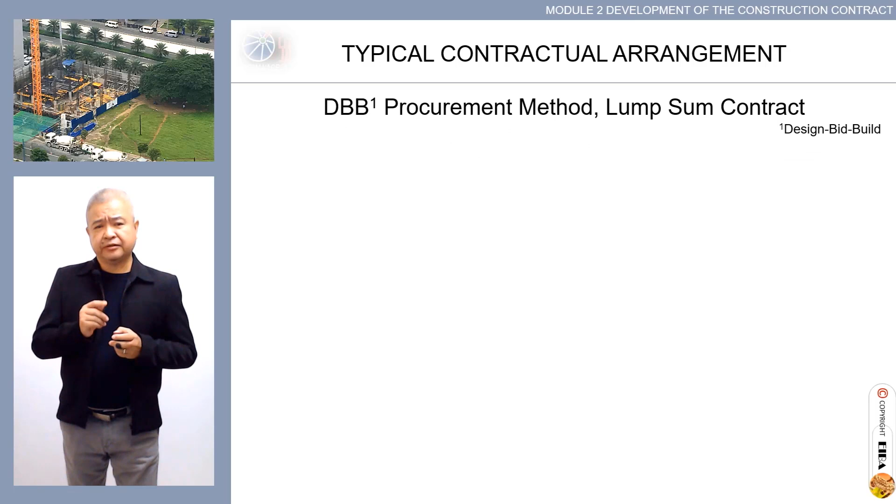Central to the arrangement is the owner. The owner may contract advisors or specialist consultants who can provide services in order to protect the interests of the owner in the project. These can be consultants with expertise in financials, contracts, and project management.

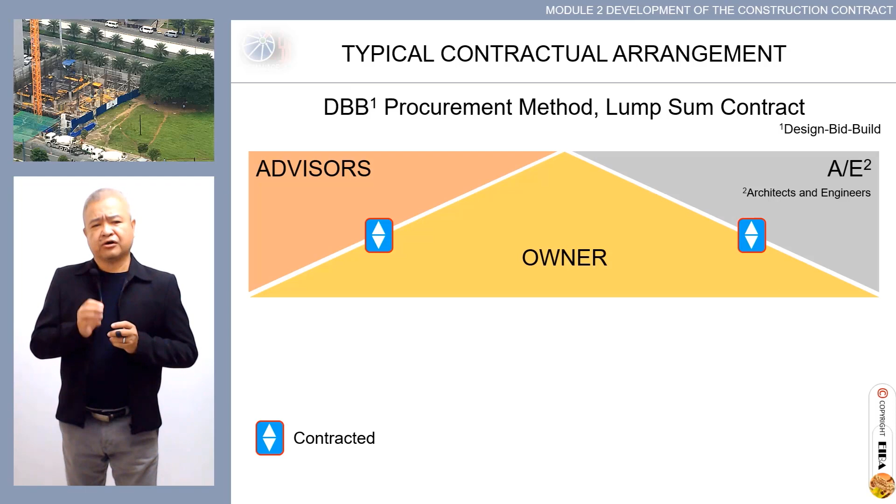Owner contracts with architects, engineers for the design engineering of the project and may technically supervise the project along that line. Owner contracts with the constructor to build the project.

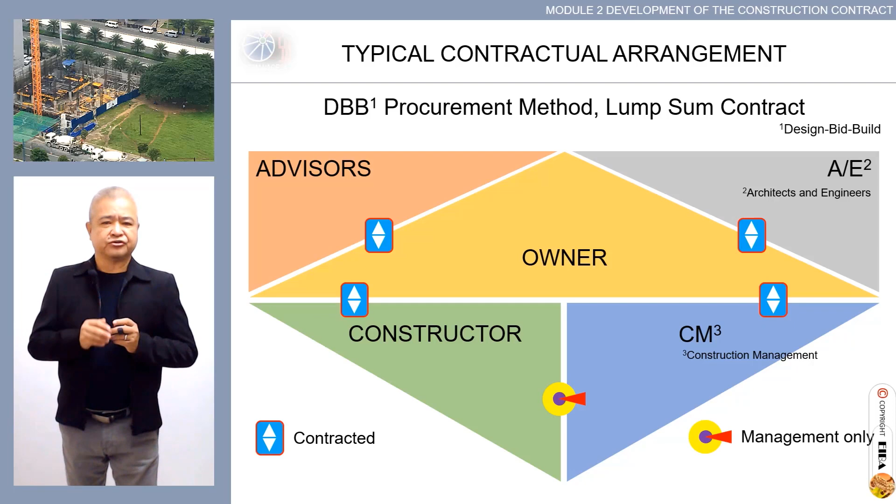Owner contracts with the construction management service or individual as construction manager. This construction manager is appointed in a management-only capacity to lead the constructor. The construction manager coordinates with the architects and engineers.

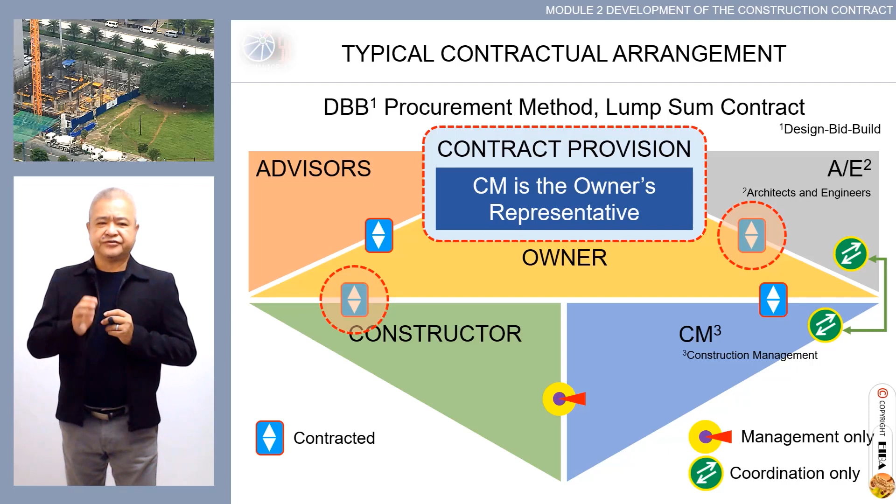A contract provision in the contracts between the architects and engineers and owner, and the constructor and owner, states the construction manager is the owner's representative. In summary, this arrangement represents the workings of contractual service.

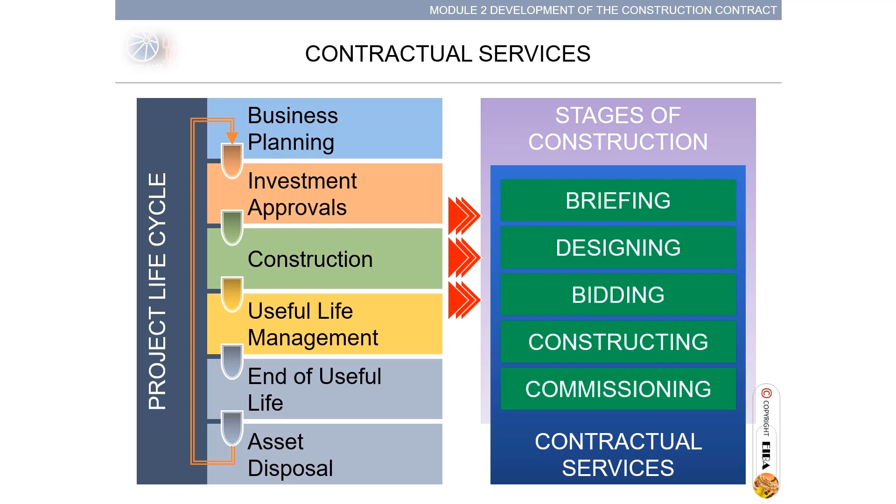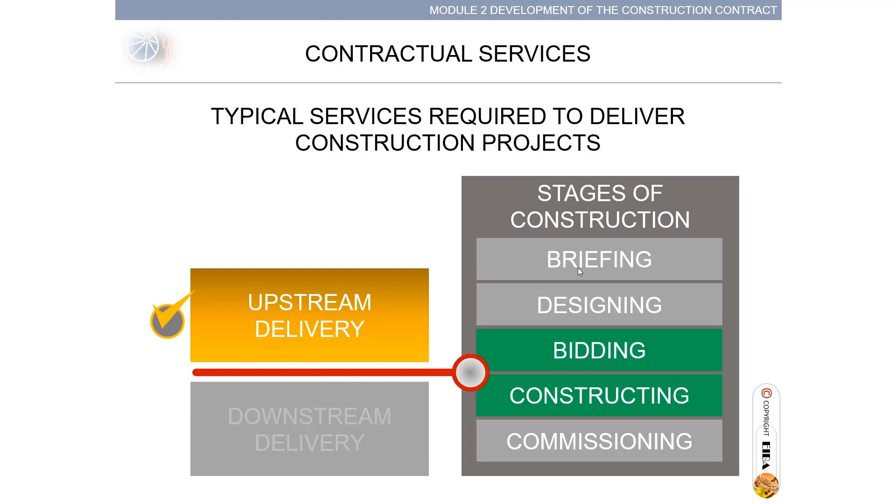Examples of upstream delivery are design engineering services (DES), or architectural engineering services, and construction management services, procurement of contract only. Let me explain design engineering services or DES.

At briefing and designing, the owner contracts architects engineers within the briefing stage. The architects engineers proceed with the designing until the bidding stages. From briefing to bidding, there are 5 phases of design engineering.

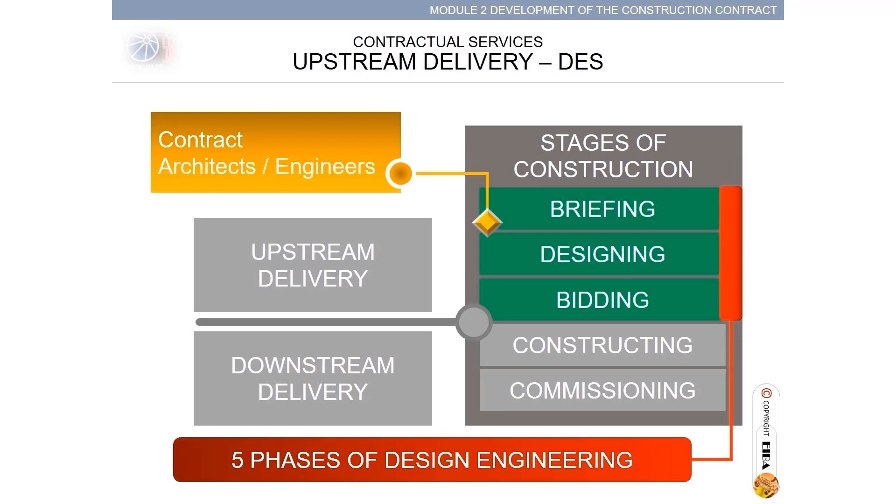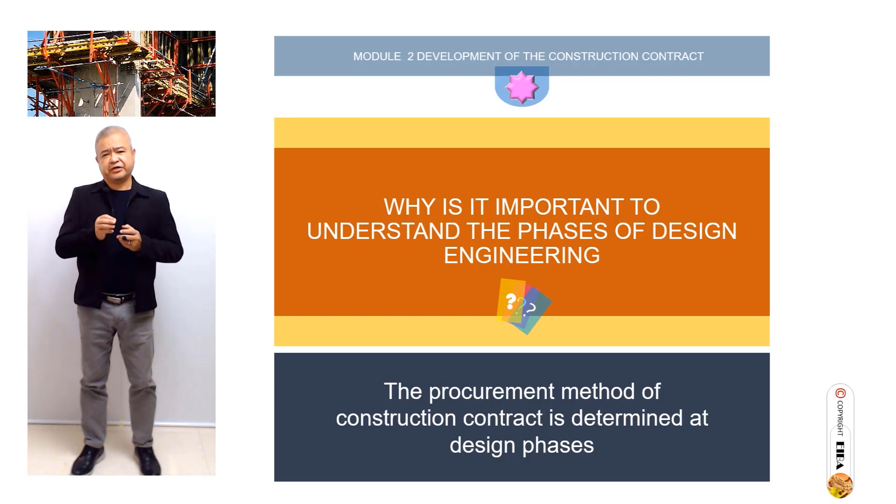Why is it important to understand phases of design engineering? The procurement method of construction contract is determined at design phases. The phases of design starts with phase 1, conceptual design or schematic design, followed by Phase 2, preliminary design or the design development.

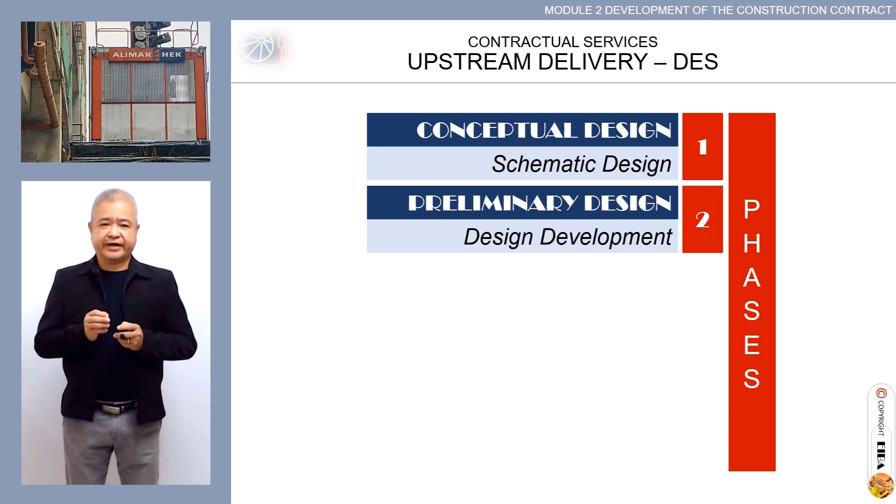Phase 3, detailed design or contract documentation comes next, proceeding to final design or bid and award phase, until the author's supervision or contract administration. The succeeding slides will explain each of the phases in details.

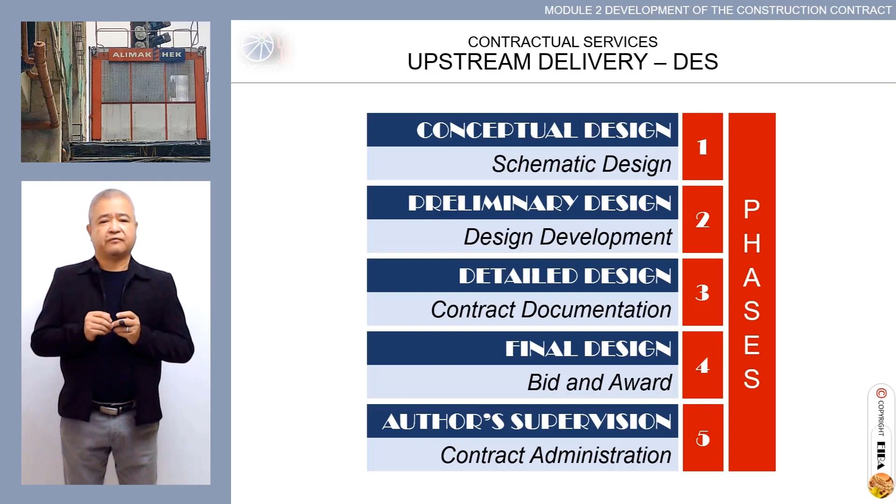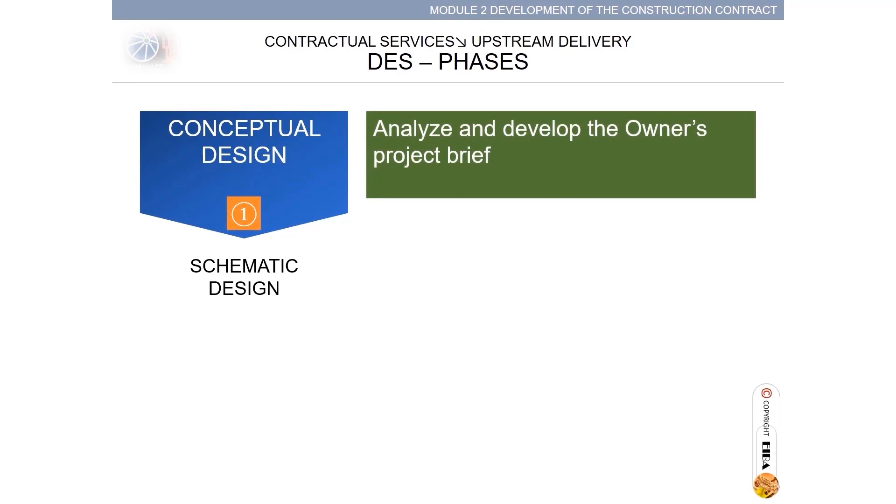Conceptual design or schematic design. The architects, engineers, or shortly designating as designers, analyze and develop the owner's project brief and start the design phase.

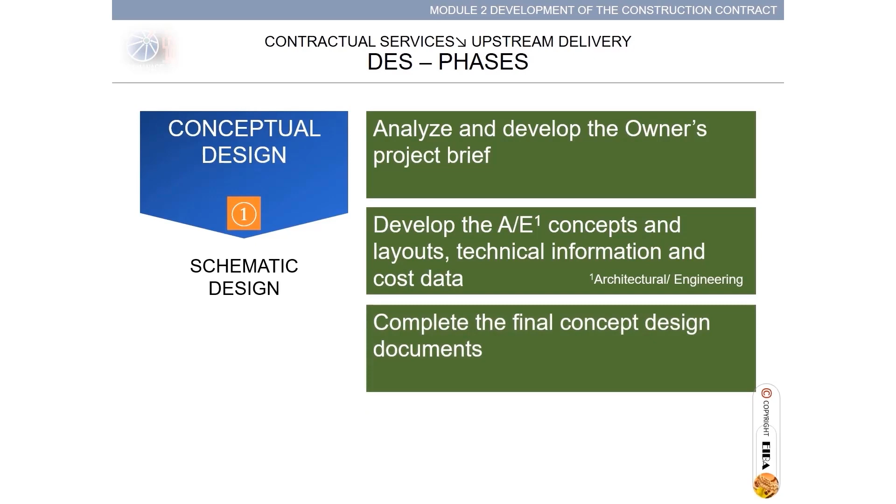The designers then develop the architectural engineering concepts and layouts, technical information, and cost data. After a series of coordination with the owner, the final concept design documents are completed. When approved by the owner, the next phase, preliminary design, is initiated.

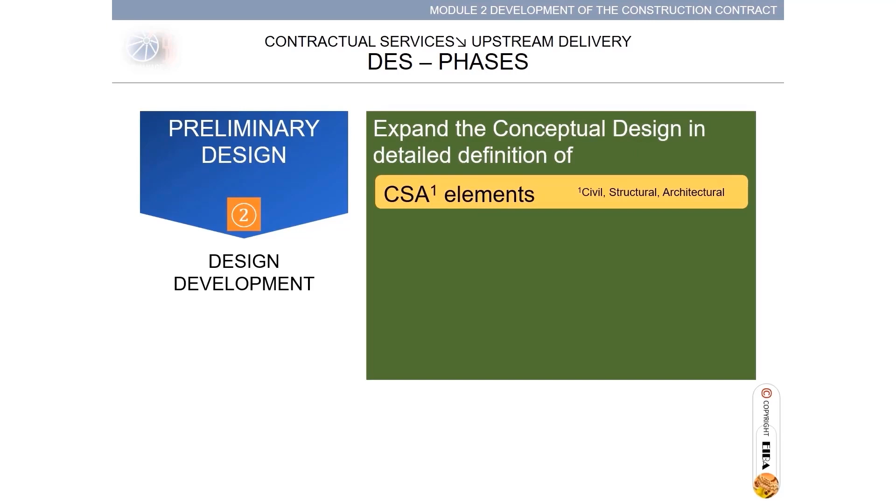Preliminary design or design development. The designers expand the conceptual design in detailed definition of the civil, structural, architectural elements, commonly abbreviated as CSA, and the mechanical, electrical, fire protection, plumbing, and sanitary services, commonly shortened as MEPS.

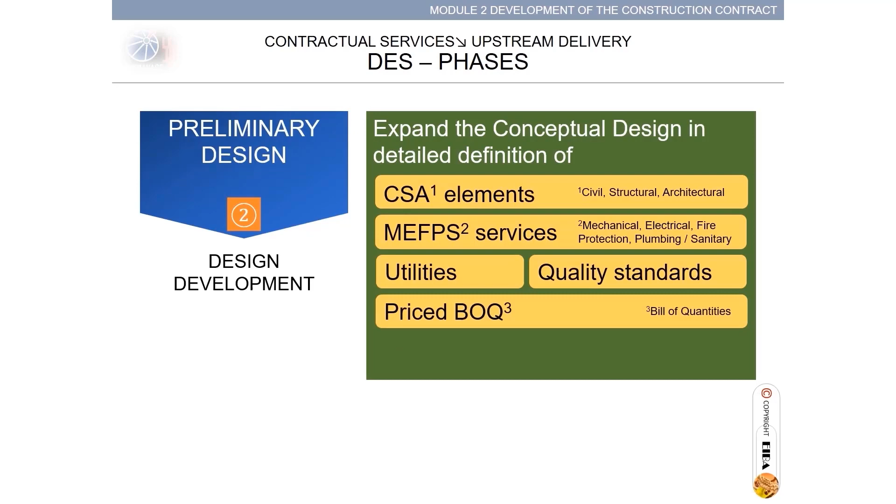Utility services. Quality standards expected of the project. Price bill of quantities or BOQs, set up to the owner's elemental cost breakdown, which we will discuss later. Incorporating to the design all comments by the owner.

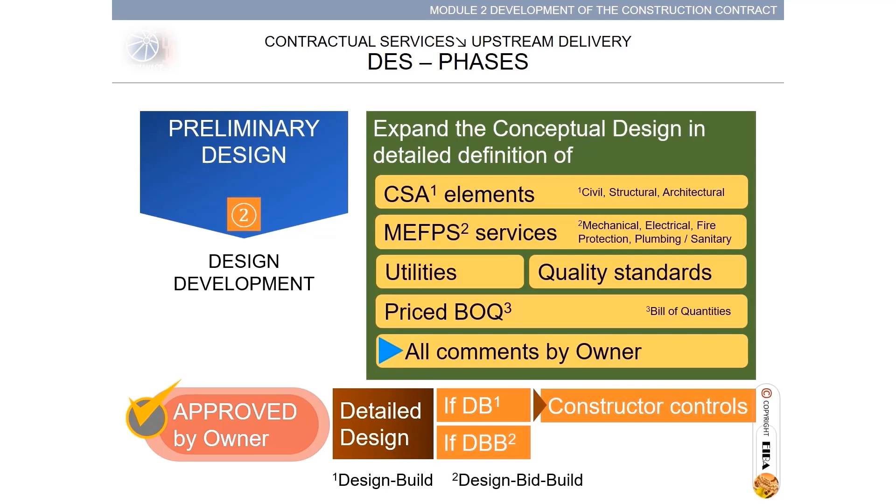This preliminary design is approved by the owner. Then proceeding to detailed design. If the procurement method chosen is design-build, the design-build contractor will control the phase. If design-bid-build, the owner controls the phase instead.

Detailed design or contract documentation. The designers fully detail design computations, drawings, specifications, and detailed price bill of quantities. The construction methods and constructability procedures are defined.

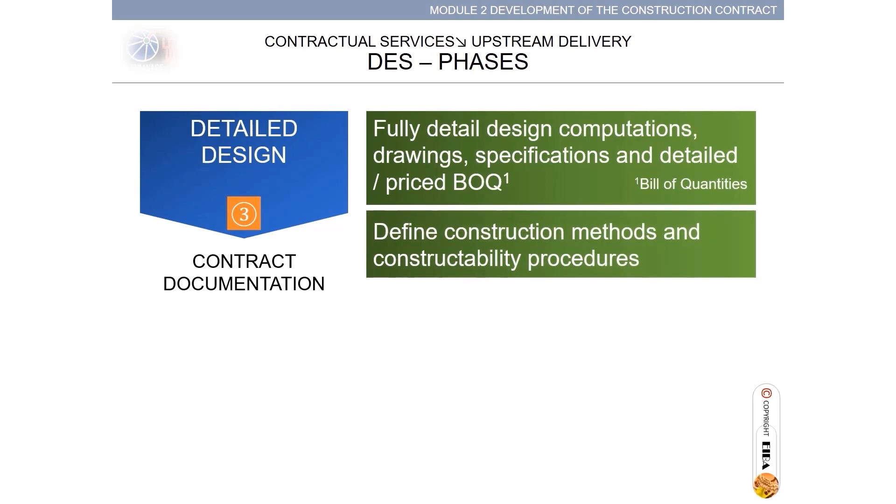Materials to be used in the project are proposed and approved by the owner. The detailed construction schedule is developed. Then, the cost estimate is also developed and aligned to the owner's template, which is the elemental cost breakdown.

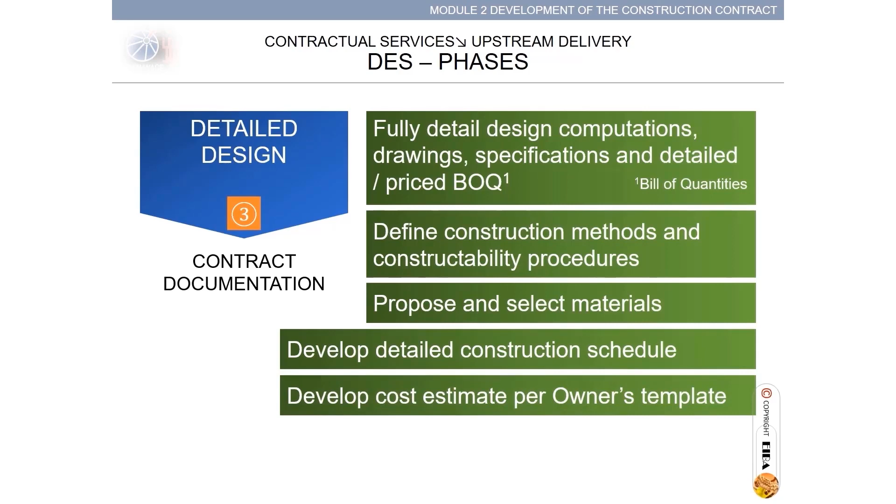Cost estimate is matched with the approved project budget. Once approved by the owner, the designers move on to final design.

Final design or bid and award phase. As required by the owner during bidding, the designers adjust and finalize detailed drawings and specifications. Complete bid documents are prepared.

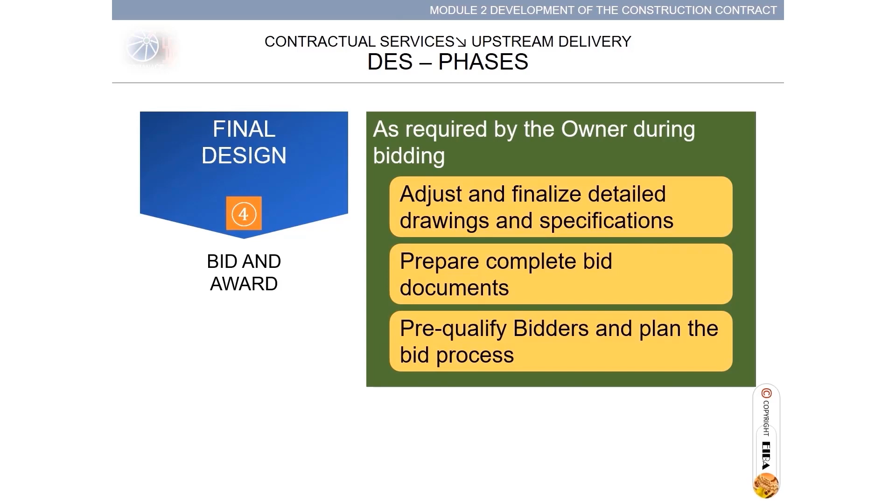I will discuss later in details what are these bid documents. Pre-qualify bidders and plan the bid process. When the final design is approved by the owner, this is now ready for bidding.

Author supervision or contract administration, as required by the owner during construction. Monitor compliance with the design engineering. Then check shop drawings, method statements, schedule deadline and cost plan.

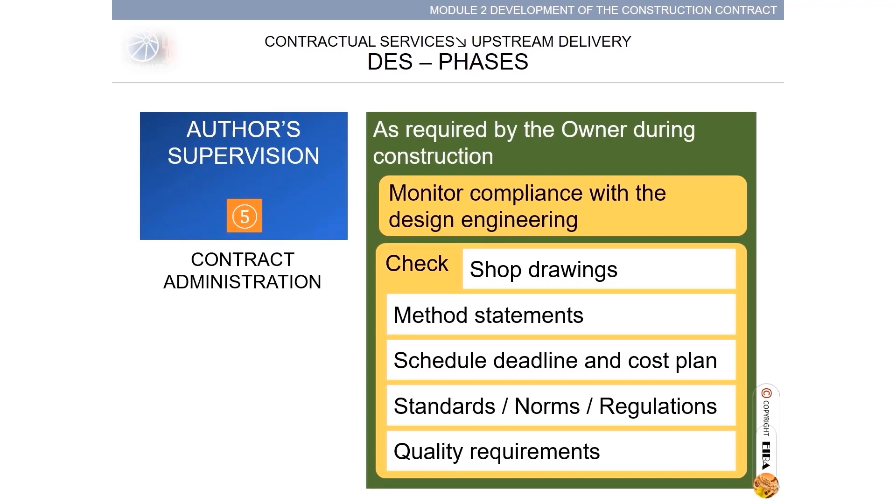That is setting the progress payment or earned values, standards, norms, regulations, and quality requirements. In all of the 5 design phases, there are specific duties and responsibilities of architects, engineers.

As owners' representatives per A/E's agreement, clarify and interpret the contract by reviewing RFIs, requests for information, design issues, and recommendations to address the issue.

Shop drawings and give technical replies to RFIs and issues. Visit the site to assess contract implementation. Define substantial and final completion dates.

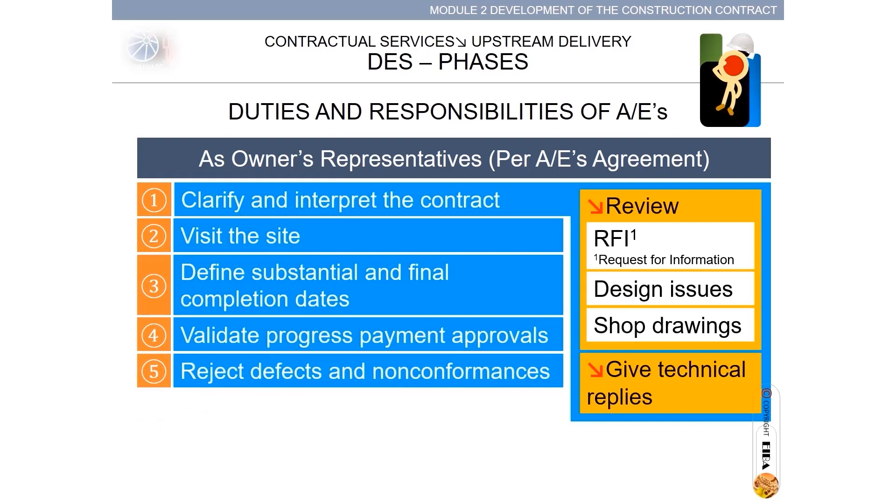Validate progress payment approvals. Reject defects and non-conformances, and ensure these are documented.

Approve submittals of documents, samples, and drawings. May reject submittals as the cases arise. Prepare modifications and change orders.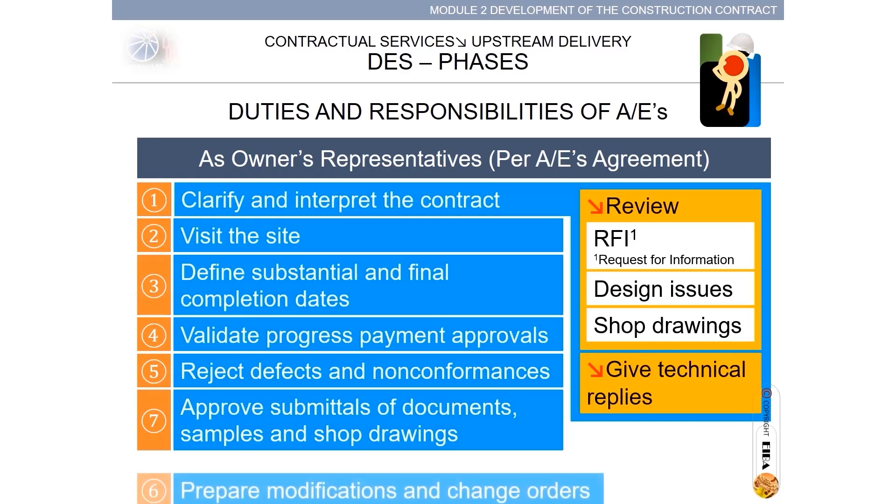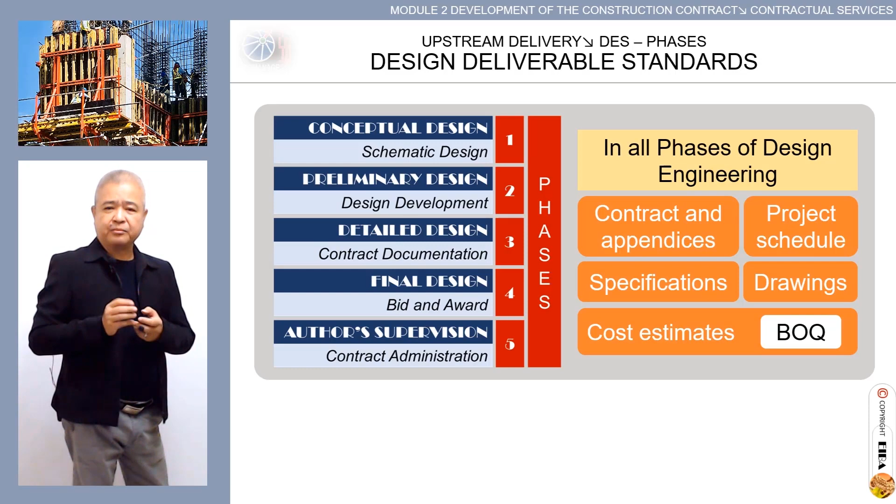The design deliverable standards as guides provide that in all phases of design engineering, the contract and appendices, project schedule, specifications, drawings, and cost estimates, including BOQ, bill of quantities, are consistently aligned with step approvals.

All of the deliverables are organized in spreadsheets of drawings and specifications, marked with document numbers and titles for traceability and tracking.

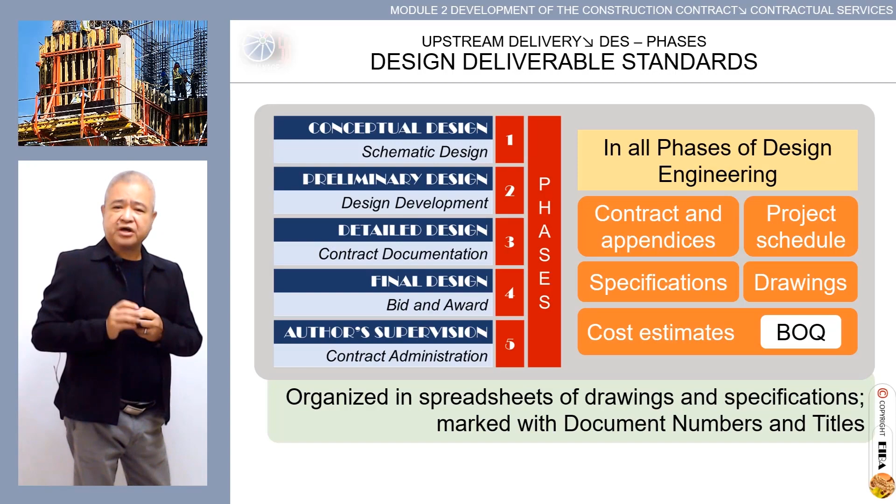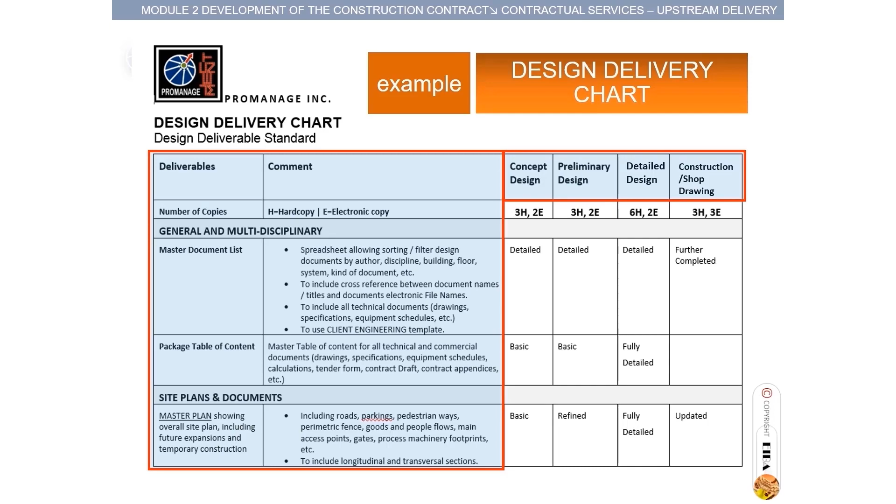The documentation and submissions are executed per the design delivery chart. To give you a view of a design delivery chart, what we have here is a chart taken out of the design deliverable standards. In the chart, we have the design deliverables heading and comments, the design phases, the delivery guides. To be more specific, let me show you a detailed chart as highlighted.

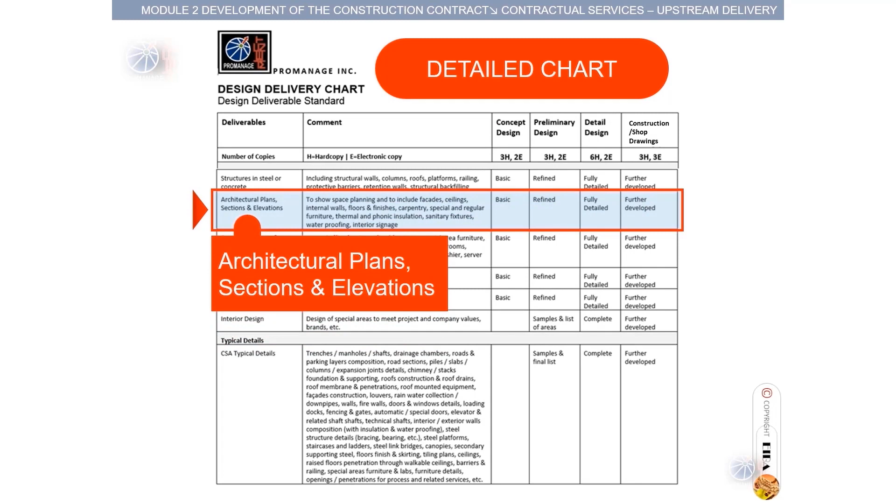The deliverables are architectural plans, sections, and elevations. Exploding this view: deliverables, architectural plans, sections, and elevation. The comments show space planning and include facades, ceilings, internal walls, floors and finishes, carpentry, special and regular furniture, thermal and phonic insulation, sanitary fixtures, waterproofing, interior signage.

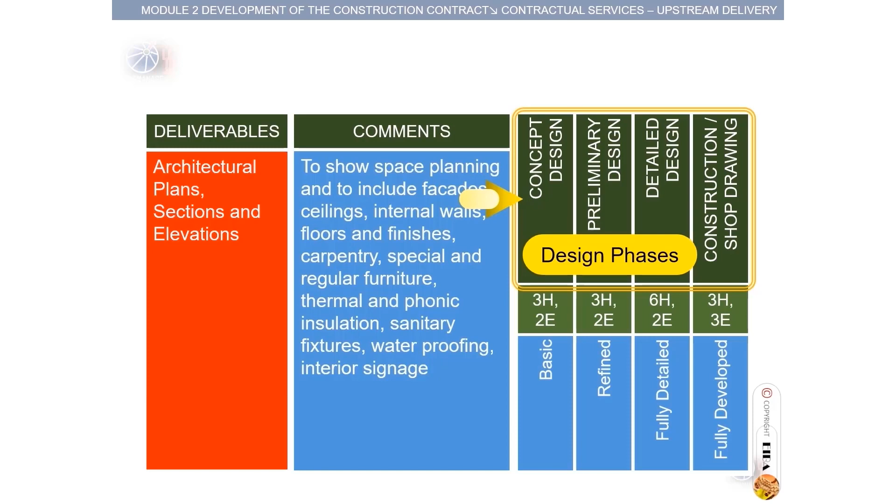The design phases go from concept to construction shop drawings. This construction shop drawing phase includes the final design to author supervision. Then the delivery guides go from basic to refined to fully detailed to fully developed. The guides correspond to the phases of design.

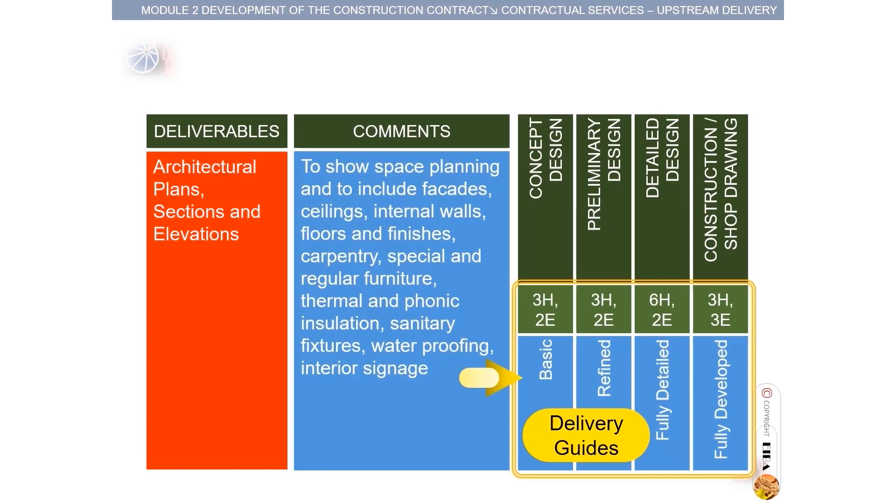At each phase, design drawings in 3 hard copies and 2 electronic copies are supplied to the owner for approvals. The designers issue the design delivery chart document as part of the requirements of the agreement between the designer and the owner.

The illustrations will present snapshots of the design delivery chart. A deliverable, which is for general multidisciplinary use, has comments to describe the deliverable, package table of contents, and master document list. Site plans and documents as deliverables are commented as master plan showing overall site plans.

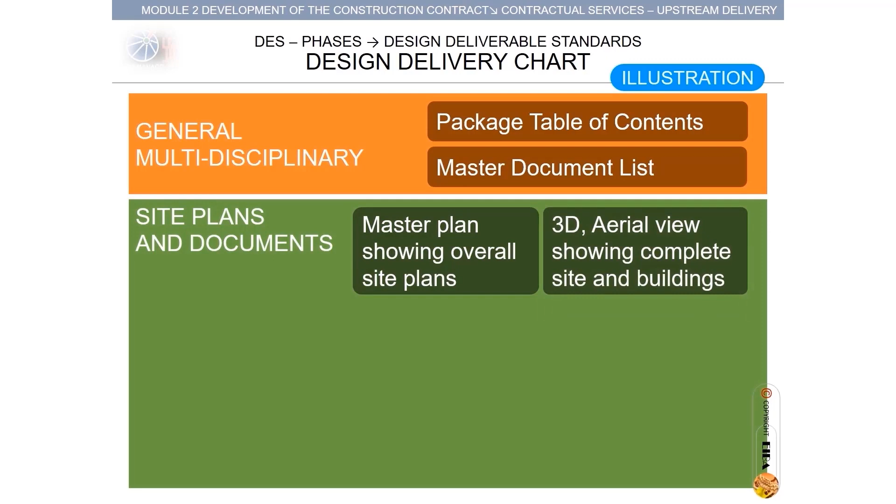3D aerial view showing the complete site and buildings. Construction phase plan showing temporary facility developments of construction. Site enabling, showing development conditions of the site.

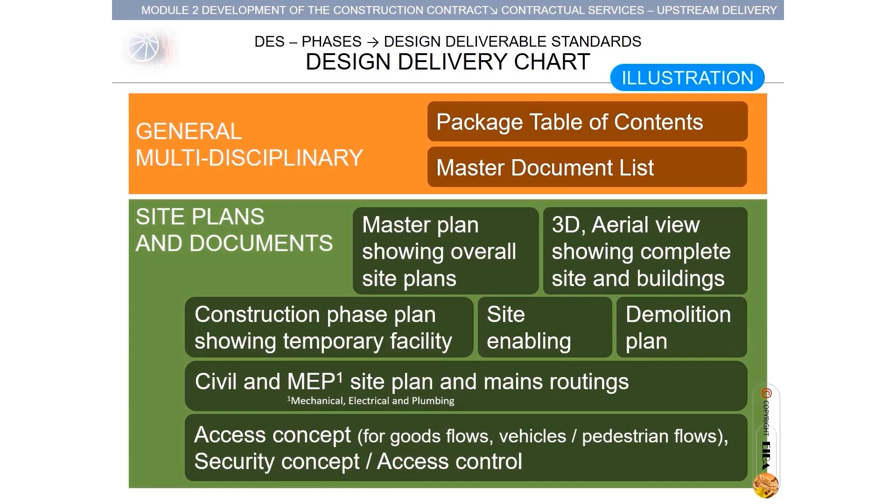Demolition plan, if the project has existing structures for removal. Civil and MEP site plan and mains routings. Access concept for goods flow, vehicles, pedestrian flows. Security concept, access control, and some more deliverables.

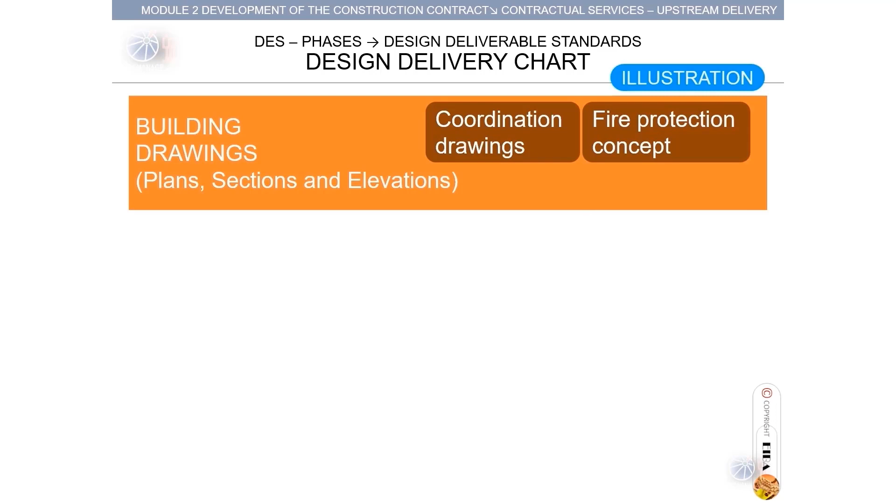The deliverables, building drawings and plans, sections, and elevations, are described as coordination for multiple disciplines. Fire protection concept. Design reports related to buildings. Room datasheets and area schedules deliverables, described as room area schedules, with all CSA and M&E items.

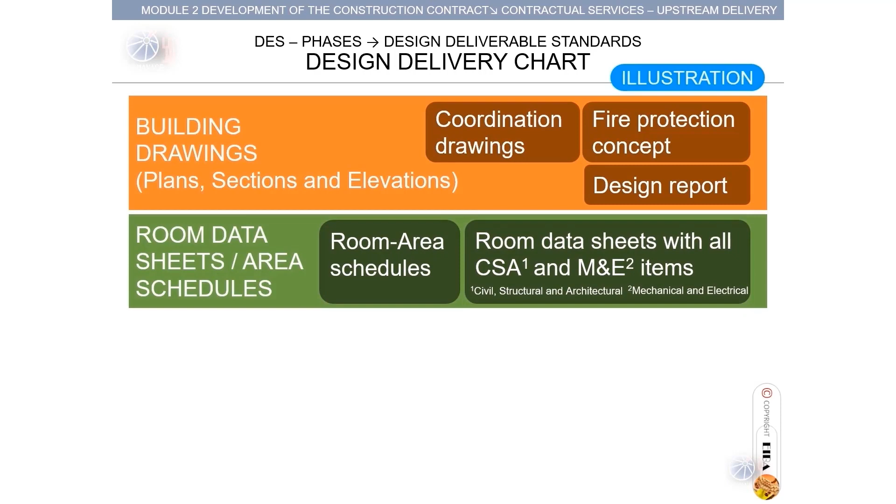Technical specifications deliverables are described as the following: construction time schedule, general calculations for sizing, scope of constructors' works, consolidated energy balance sheets, and installation in operation areas, including battery limits, setting extents of equipment locations with respect to the building.

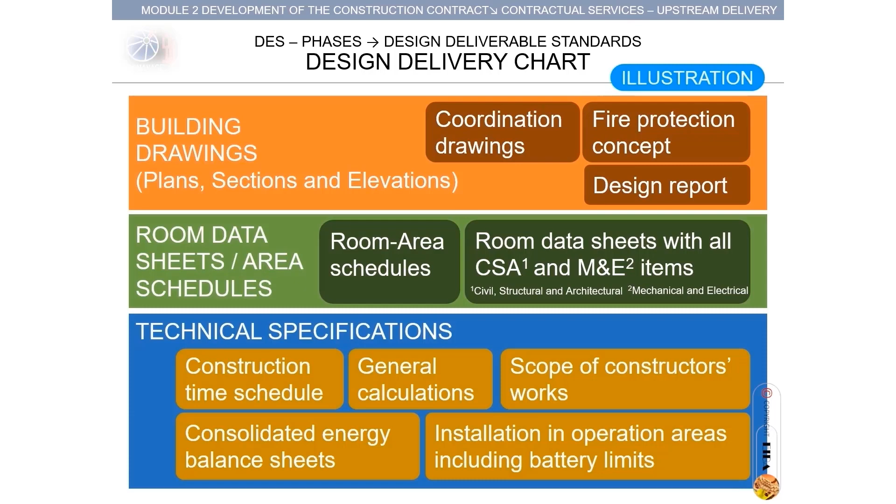And two more deliverables: the deliverables, cost estimates and templates, and unit rates, described as project costs, showing estimates, showing ECB, elemental cost breakdown template. This is defined by the owner, showing BOQ and schedule of unit rates.

For all disciplines, the deliverables CSA—civil, structural, and architectural—are described as site plans and documents having the following details: topographical and site surveys, groundworks, signage, general site plan with main routings, site connections with electrical and mechanical, landscape and fence, geotechnical and hydrological studies, design reports specially related to the design engineering, and two more deliverables.

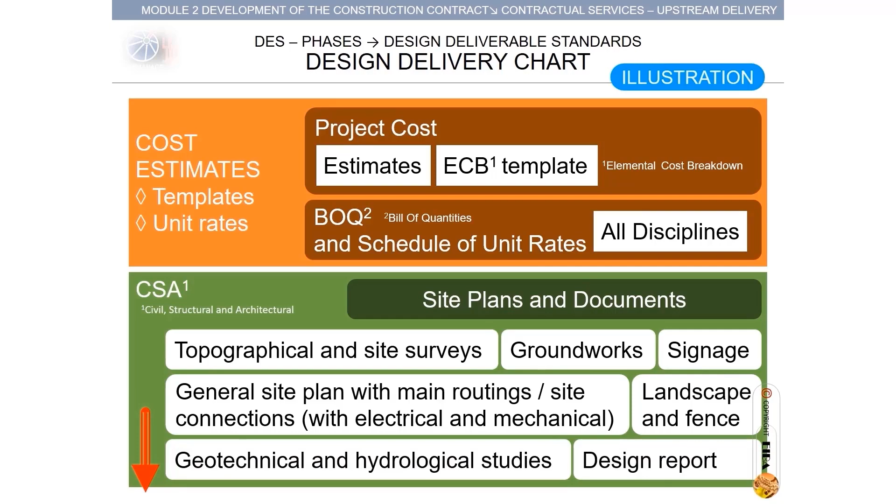Just a few slides back, until this point, in summary, about the 5 phases of design engineering: the design phases follow the design deliverable standards, which in turn govern how drawings and documents are created and submitted to the owner, and these standards are guided by the delivery chart.

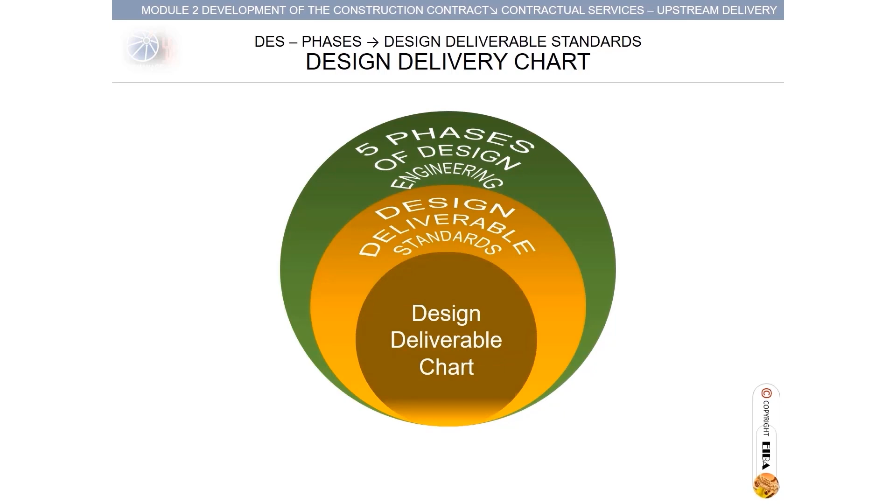Now all of these are outputs of design engineering services. The upstream delivery services result in outputs of design engineering.

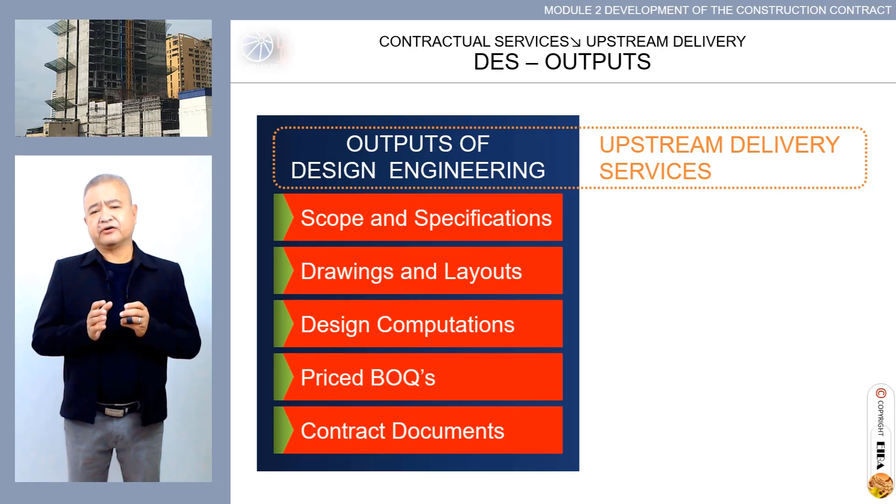Scope and specifications are written. Drawings and layouts are well defined and match the scope and specifications. Design computations are included to assure engineering. Priced BOQs, bill of quantities, are prepared. Contract documents are well refined and ready for bidding.

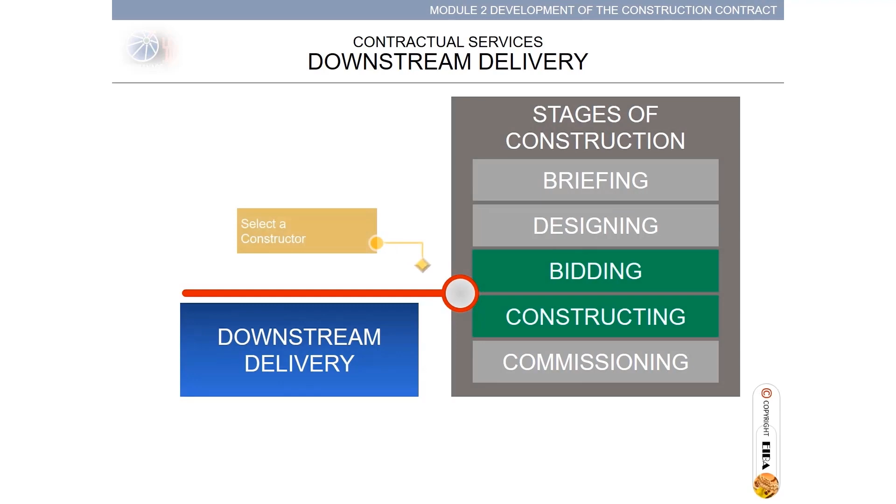These outputs now become the inputs to downstream delivery services. The downstream delivery happens at the end of bidding, but before the construction stages. The owner selects a constructor, then appoints a construction manager, usually termed CM.

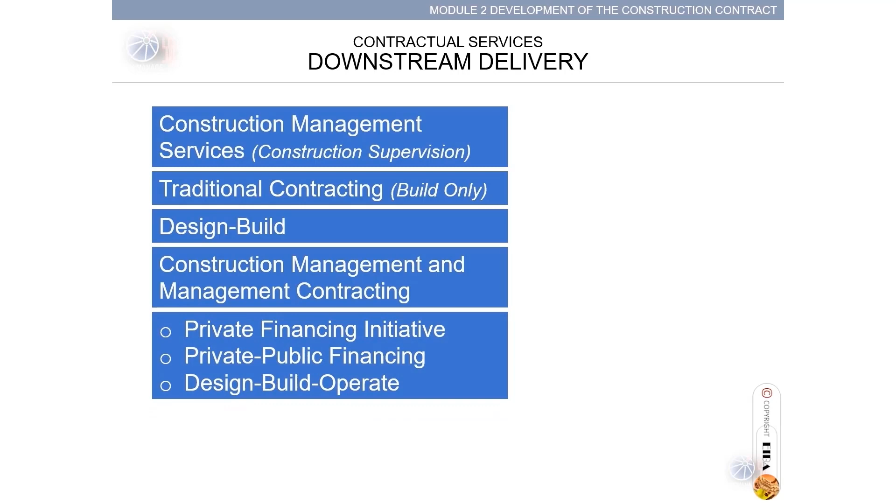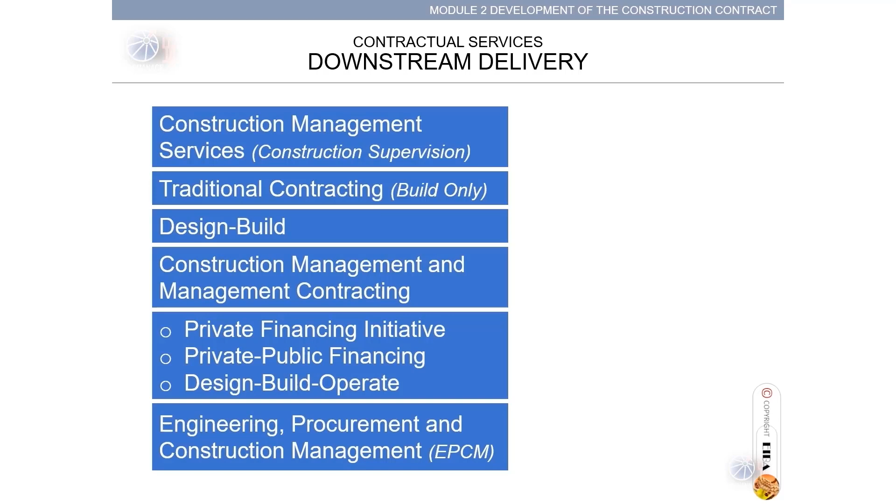The downstream delivery services can be construction management services for construction supervision, traditional contracting for build only, design build, construction management and management contracting, private financing, public-private financing, design-build-operate for projects encouraged by the partnering of government with private entities, engineering procurement construction management (EPCM), a hybrid of design-build contracting, and more contractual services.

These are procurement methods of construction contracts and will define the type of contract. We can now have a summary of the contractual service.

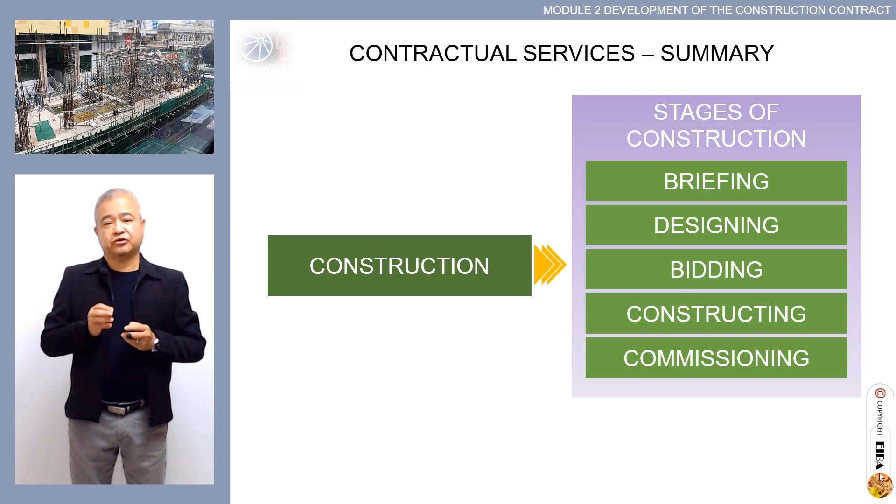The construction phase of project management has the stages of construction such as briefing, designing, bidding, constructing, and commissioning. The owner contracts with architects and engineers at the briefing stage to perform design engineering. The activities progress into the 5 phases of design engineering.

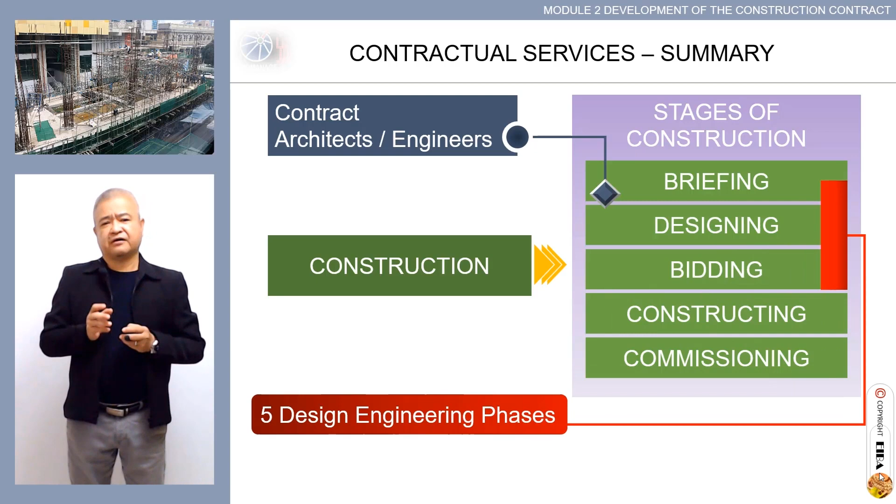After the bidding stage, the constructor is selected. At the same period, in many cases, the owner appoints the construction manager prior to the construction stage. The construction and commissioning stages are the phases of construction: pre-construction, construction, and post-construction. The engagement in all of the stages are generally contractual services.

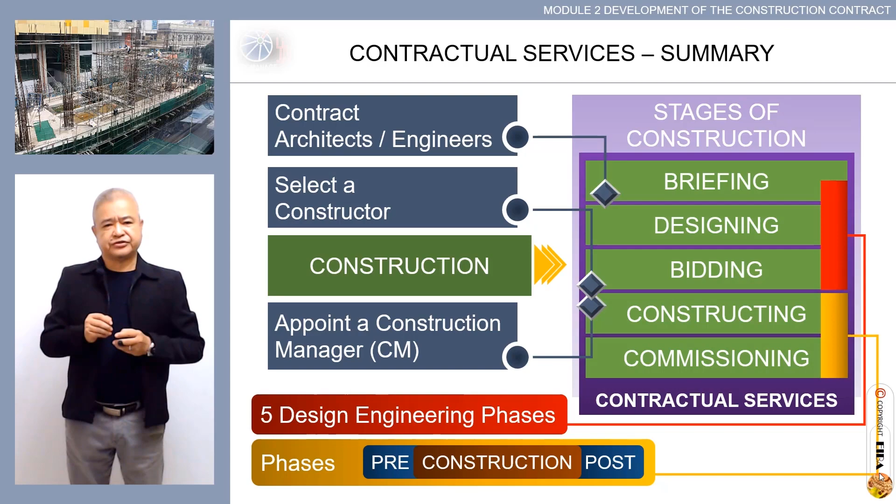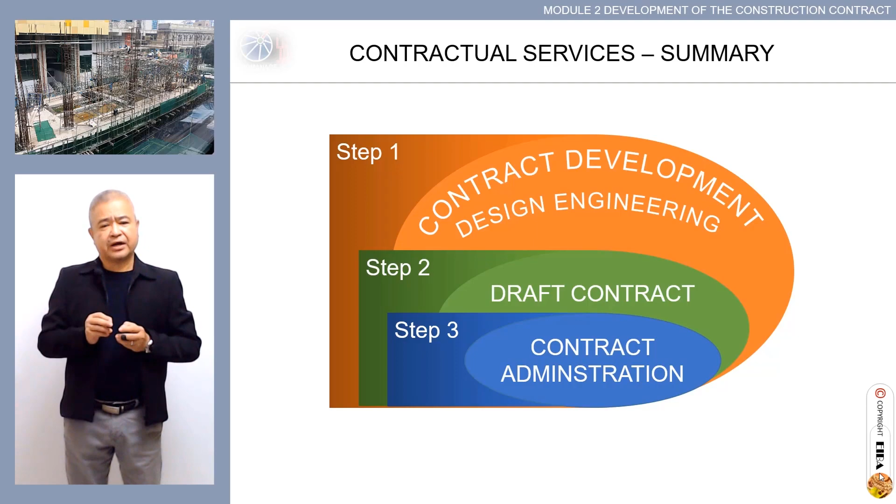To simplify the explanation of contractual services: Step 1 is contract development, where design engineering occurs. Step 2, the draft contract and its attachments are prepared for bidding, and then the owner contracts with the constructor. Step 3, contract administration. We will proceed with contract administration in detail.

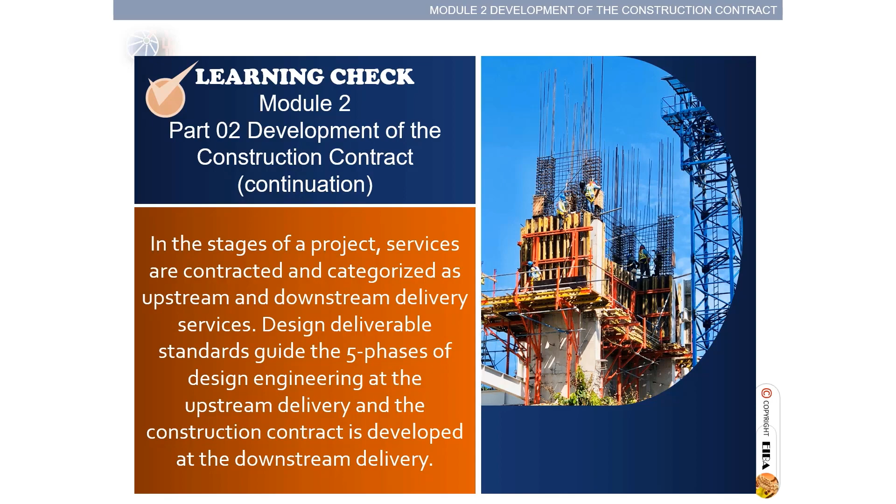Continuation: in the stages of a project, services are contracted and categorized as upstream and downstream delivery services. Design deliverable standards guide the 5 phases of design engineering at the upstream delivery, and the construction contract is developed at the downstream delivery.